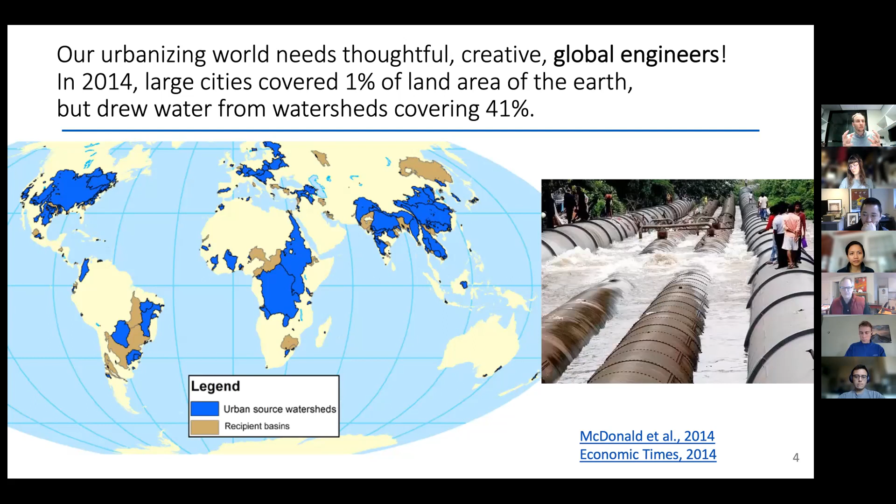And there are lots of people who do fantastic work on urban ecology and thinking about the metabolism of a city. But fundamentally, when you pile that many people in one place, they need huge energy and resource flows both in and out of the cities. And today we're going to talk about the water supply flows into those cities.

Here's your refresher on what safely managed means or needs. The water supply needs to be on the premise. So in your front yard, in your backyard, or in your house. Why? Because then you'll use more of it and social marginalization can't affect how much you get.

It has to be free of contamination. That's important. It also needs to be available when needed, because giving people empty water pipes is useless. You need water in your water pipes. And when you have those conditions, it counts as safely managed.

So why don't we have data on these countries? We have data from nationally representative data. That doesn't mean we know everything, but we know enough to make a credible estimate for premise piping in 90% of countries. We know for 60% of countries what percent of their supplies are contamination free. But we only know half of the countries in terms of whether or not they're available when needed.

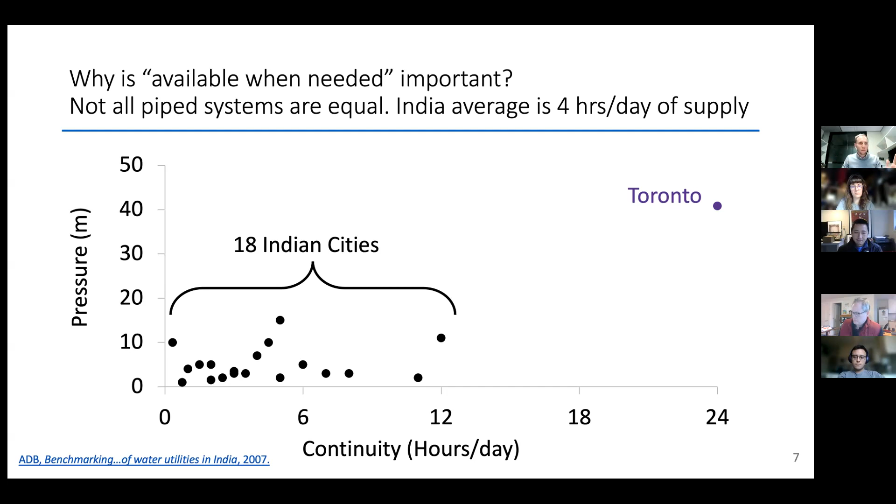So you guys are here to learn about systems, but you also think about them already, I suspect. This isn't your first foray into this domain. And you guys are clever problem solvers or clever engineers. And so you can imagine if you were one of the 1 billion people on the planet who plugged into an intermittent water supply, you would find ways to make it better.

So intermittent water supplies are not just an Indian issue, they are pervasive. Aaron Bivins in 2017 did a great estimate that suggested 1 billion people are plugged into intermittent water supplies, which means that 1 out of every 5 people on the planet that gets water from a water pipe gets water from an intermittent water pipe, which means improving them is key. So if you were one of these 1 billion consumers, you would adapt. And here are 3 adaptations I see all the time.

On the left, we call them spaghetti pipes. If you live in a neighborhood with low pressure or not that much water, and you're not that far away from another neighborhood that has better pressure, maybe they're from a different segment of society, maybe they're just at a more favorable elevation, but maybe the chief of police lives there. Well, you could buy yourself a pipe at the market, and in the night, either yourself or with a plumber, run that pipe over to your neighbor's house and plug it into their water main that's serviced with better pressure.

And then all of a sudden you've got lots of water, so your neighbors think, that's great, I'll do it too. And then when you drive down the road, you see piles and piles of spaghetti pipes leading from a low pressure neighborhood to a high pressure neighborhood to improve the supply. I picked this particular picture because you can see that these pipes are right next to an open sewer. So we have this constant tension between water access and water quality.

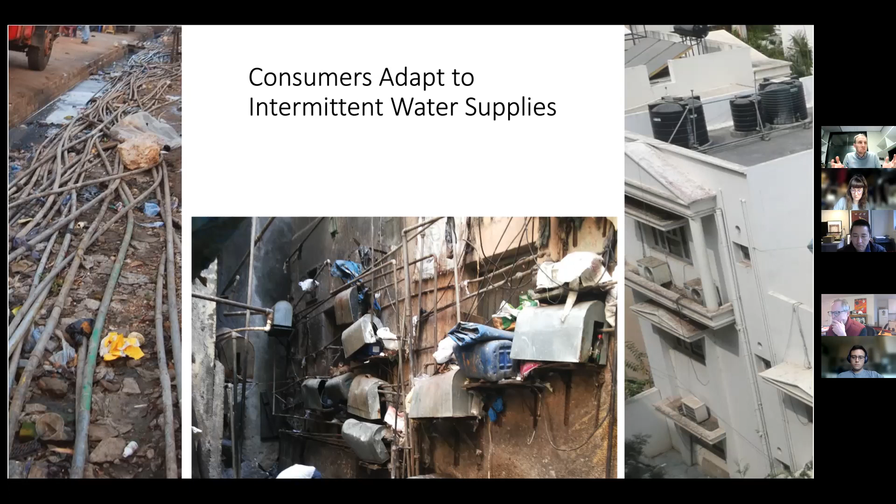So consumers are great at adapting to intermittent water supplies. Why are they a problem? Well, fundamentally, the first problem with intermittent water supplies is water quality. So positively pressurized pipes push water out of their cracks. That's what keeps our drinking water safe.

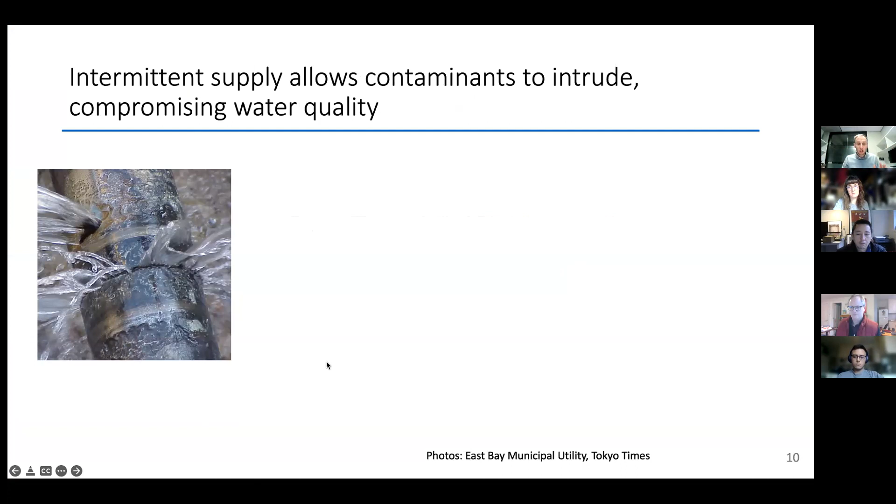If you have a low pressure supply or a negative or an empty pipe, the cracks can go the other way and contaminants can intrude into the water pipes. And then when we turn the system back on, that wall of gross water that has filtered into the pipes overnight while they were turned off gets flushed through the system to those eagerly expecting consumers.

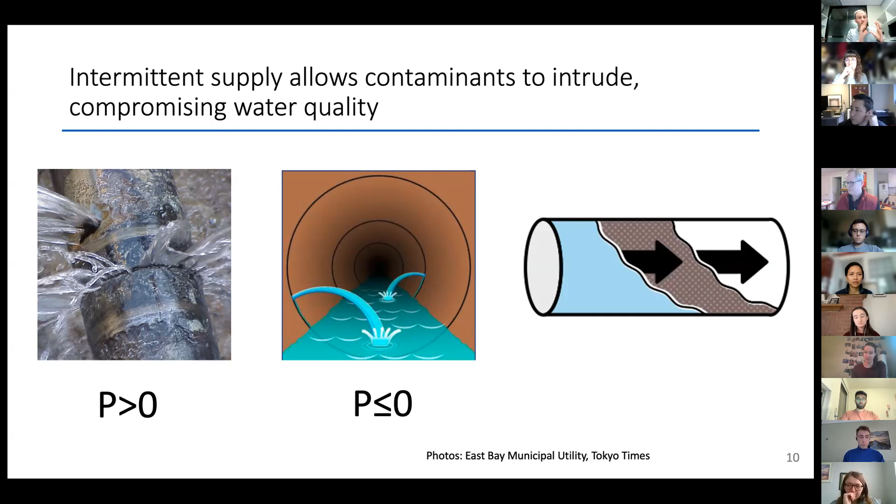You can imagine that if you have a tank on your roof, this big black plastic tank, and you fill it with the intruded contaminants that came overnight, it spends all day baking in the sun, and you get your own little bioreactor. So intermittent water supplies can allow contaminants to intrude, which compromises our water quality.

So improving intermittent supplies is really important, but it is not easy. So I don't know what else is going on in your day, but I hope that none of you have on your to-do list to make the calibrated hydraulic model for the network pictured here, right? This would be impossible. Yet in our traditional kind of top-down engineering mindset, what we like to do is know everything about the system, calibrate our mathematical models, and then be able to predict the future, right?

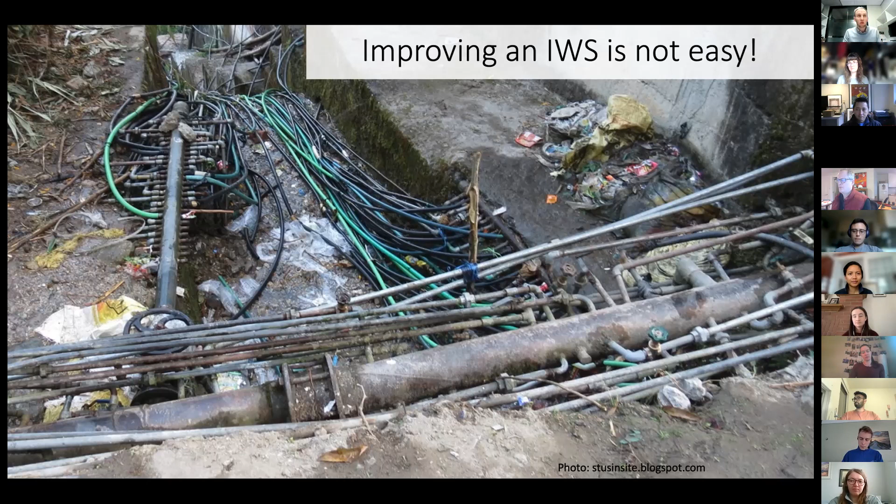We talk about this digital twin between the real world and the hydraulic world as kind of the new frontier in municipal engineering. There will be no digital twin for this picture. Priya Sangameswaran writes beautifully about neoliberalism and Maharashtra's water supply reforms. And she critiques that the current method of improving water supply networks requires near perfect knowledge, which is totally at odds with the chaotic arrangements that actually characterize Indian cities.

This is not a critique of Indian cities, but it would generalize to most intermittent water supplies, to most megacities around the world. They are growing rapidly, and the chaos associated with that growth is kind of an affront to our traditional, we must understand it before we can improve it, engineering paradigms.

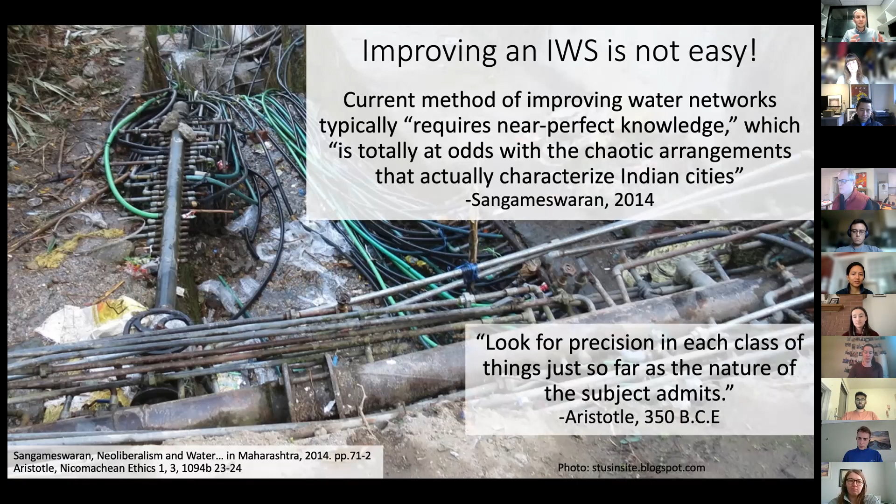So what can we do? Aristotle might recommend that we look for the precision in each class of things just so far as the nature of the subject admits. And I would submit to you that the nature of the subject in this photo suggests that we better do something pretty simple because of its chaos. So what I want to tell you about today is the simplest ever model for an intermittent water supply. It has only one consumer.

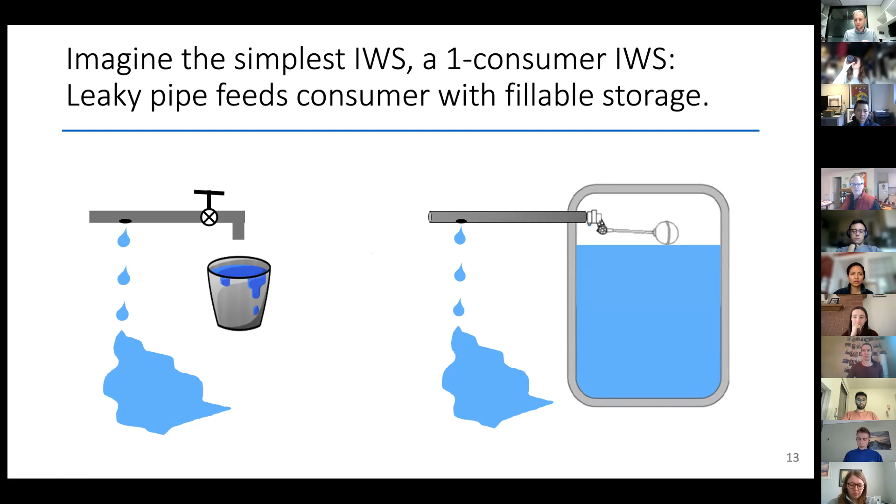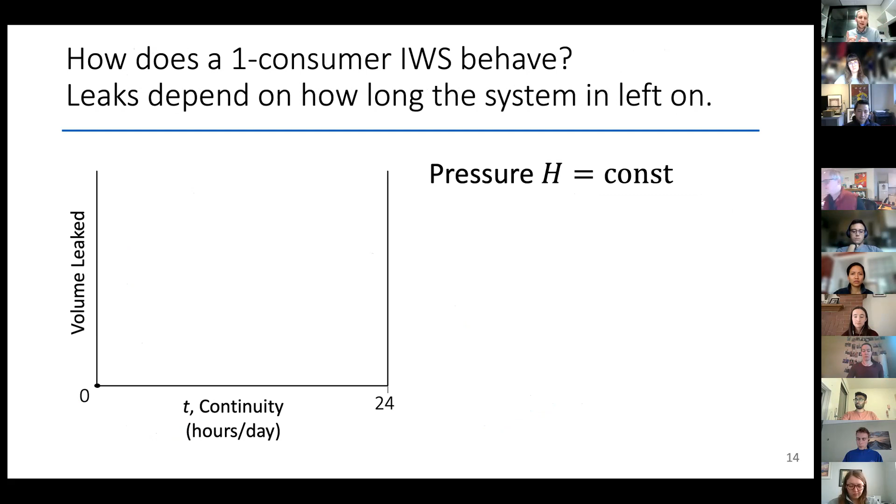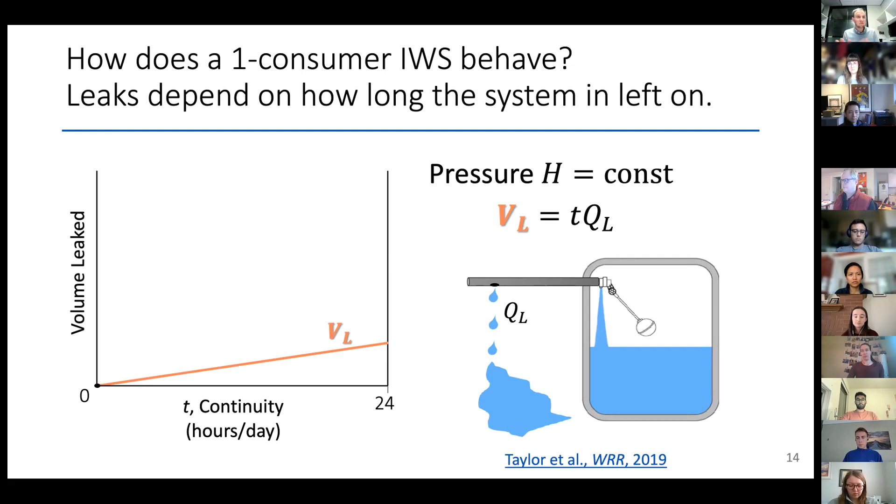So with this model, we'll go forward and say, what can we do with this? How does a one consumer intermittent water system behave? Well, the leaks in a simple system with constant pressure come out at constant pressure at a constant flow rate. So then the longer we let it leak, the more water we lose to leakage, right? If you go from 2 to 4 hours a day of supply, leakage doubles in the short term, all else being equal. From 4 to 8, doubles again. 8 to 16, doubles again.

What about the amount of water received by consumers? If you only give everyone in your network 10 minutes of supply, no one has enough. So if you leave it on for 20 minutes instead of 10, everyone would like double what they just got. And if you go from 20 minutes to 40 minutes, that's probably true again. But somewhere, when you go from 20 hours of supply to 21 hours of supply, most people's swimming pools are already full. And so somewhere on this curve, consumers become satisfied and their tanks are full.

And so this was my big idea behind this model, is that there are two regimes, one where consumers are filling their tanks and one where they're pretty happy. And so if we put on our top-down water utility hard hats and say, how much water do we need to put into this network? Well, it simply becomes the superposition of these two piecewise linear curves. For every liter we lose to leakage or liter that goes to a consumer, that's a liter of water that needs to go into the network.

And here's where the model gets interesting. We can now study these two very different regimes. And we can use this model to probe the causes of intermittent supply and perhaps opportunities to improve them. So if you're operating a water utility and all you have is that dashed blue line of water availability, you have an intermittent water supply. Your intermittent water supply cuts off at time t. Maybe that's, I don't know, 10 hours a day of supply.

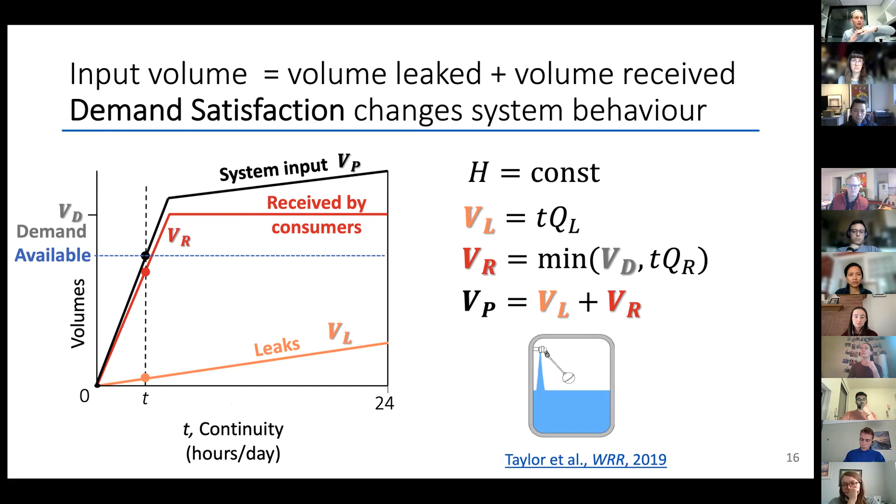If it gets to be the dry season and you have less water, you still have the same pipes. They still leak at similar rates. You still have the same consumers. But all of a sudden you have way less hours per day of supply because of a source water change. So these two regimes, the steep slope area and the shallow slope area, are the key features I want to spend a good chunk of time today talking about.

But before we talk too much more about this model, you ought to ask yourself, why would I care about a one consumer model? No one has a one consumer intermittent water supply. Is it accurate? Should I trust it? So to test this in my research, I compared it to a numerical simulation of a physical network inspired by the Modena network in Italy. It's one of these free EPANET models you can download. It's a continuous water supply. So to make it an intermittent water supply, I gave every consumer tanks and some leaks in the network.

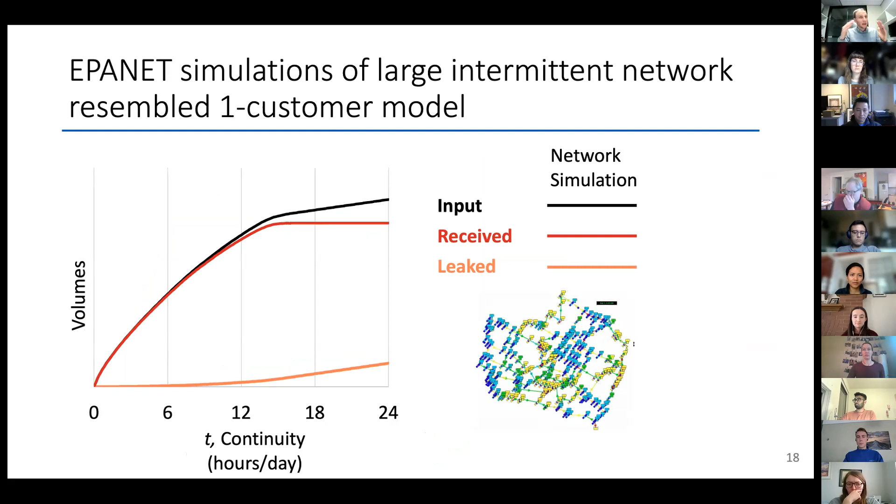And you simulate it spatially and temporally, so it's changing over time and space. And you can watch consumers go from yellow, not having enough water, all the way to blue when they're happy. And now we can ask, how did that network perform? So this is the numerical results from that simulation. Is it piecewise linear? No. Is it a whole lot like the straight line model I constructed with you guys? Yes. And in fact, it was surprisingly accurate. I got an R² after calibration of 0.98. So almost all of the variation in this model is explained by the piecewise linear behavior of a one consumer intermittent supply. So that gives me reason to think we should probe this simple model to learn about intermittent supplies.

And so if we do that together, I'll call this green region, where the black line is pretty shallow and consumers have the water they want, a satisfied intermittent supply. And I would suggest that improving intermittent supplies like this is hard, but feasible. So in this example, the intermittent supply operates for 12 hours a day, but consumers would be satisfied if they got anything more than 6.

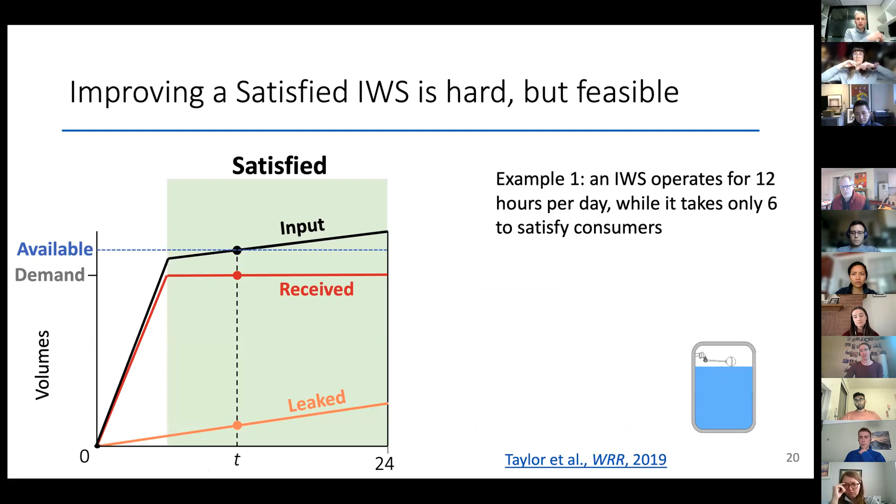So you're running this utility and you want to fix the network, or you're at a donor agency trying to figure out how much money to allocate to help this city improve their water supply. Well, in this type of water supply, if you found and fixed leaks in your network, so you went from the solid orange line to the dashed orange line, you could change the black curve and run your city 24 hours a day with the same amount of water, because as you slow down the flow rate of your leaks, you can leave them leaking longer.

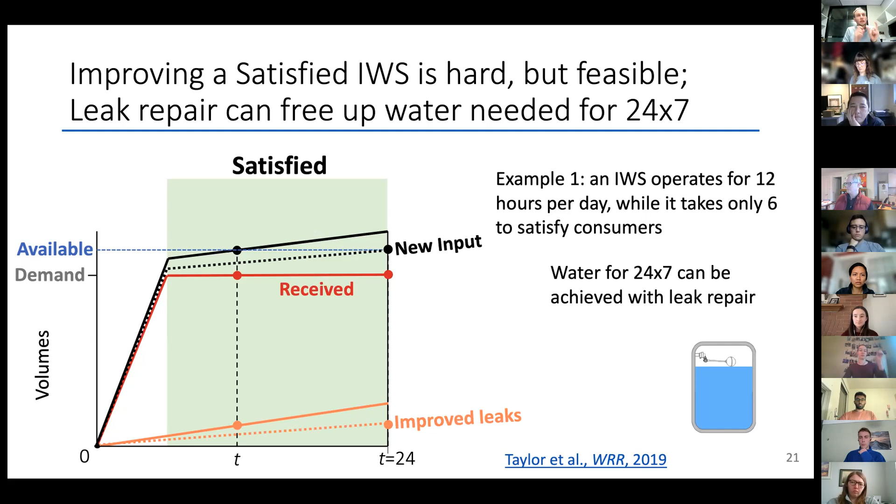So we can achieve 24/7 in these systems by leak repair alone. But there is a harder part of this story. If you are working with an unsatisfied intermittent water supply, they're really hard to improve. So in this example, the intermittent supply operates for 2 hours a day when it would take 6 to satisfy consumers. So I'm going to stretch this graph out to be from 0 to 6, not 0 to 24 on that horizontal axis, just so you can see what happens.

And what happens here is that blue line is our water availability. And so if you pay a public agent, if you pay a water utility or you privatize your network, your private operator is going to spend a lot of money finding and fixing the leaks. And if they find and fix every single leak, you can increase your supply hour. But you probably did not fund this project expecting to go from 2 hours a day to 2.4 hours a day of water supply. You would have spent millions of dollars finding and fixing leaks, arguably for naught.

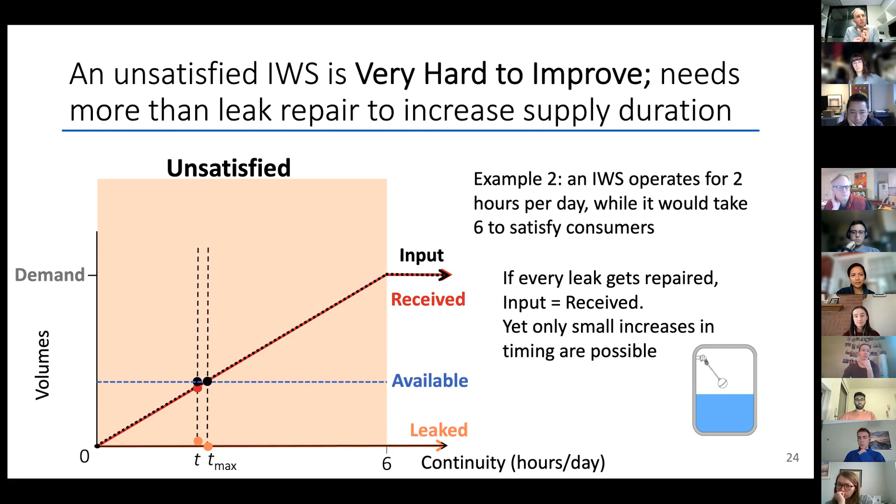So only a small increase is possible with leak repair alone in this type of intermittent supply. Even if it's a really leaky intermittent supply, like 40, 50% leakage, when you fix all of those leaks, you still can't satisfy your network. And so this type of intermittent supply is much harder to improve. And I think it needs different planning tools. I think we need to be more realistic about the projects we set up in these systems, because we certainly shouldn't be spending a lot of money to find and fix the leaks, believing that will be the mechanism by which we achieve continuous supply.

So I've used this model to argue there are two types of intermittent supplies. Very hard to improve intermittent supplies, where at the end of the supply, customer tanks are still empty. If you gave them more water, they'd take more water. And the everyday, just hard to improve intermittent water supplies, where at the end of the supply, consumers are satisfied, which means the leak repairs are an efficient lever to pull. If you want to read all about the calculus and the model behind this, there's some links in the slide deck. But I want to focus on the implications, because this isn't a theory talk.

The first thing I think we need to be really clear about is that demand is what consumers want, not what they should want, not what public health guidelines suggest we should give them as a minimum. So for example, if your standards manual suggests that you should provide 150 liters per person per day to everyone in a city, if you happen to be supplying to a neighborhood where people, for whatever reason, haven't read that standards manual and would like 200 instead, then you're in this setup with the blue curve and the red curve, and you will have an intermittent supply. An unsatisfied intermittent supply, simply because you have failed to account for how much consumers actually want.

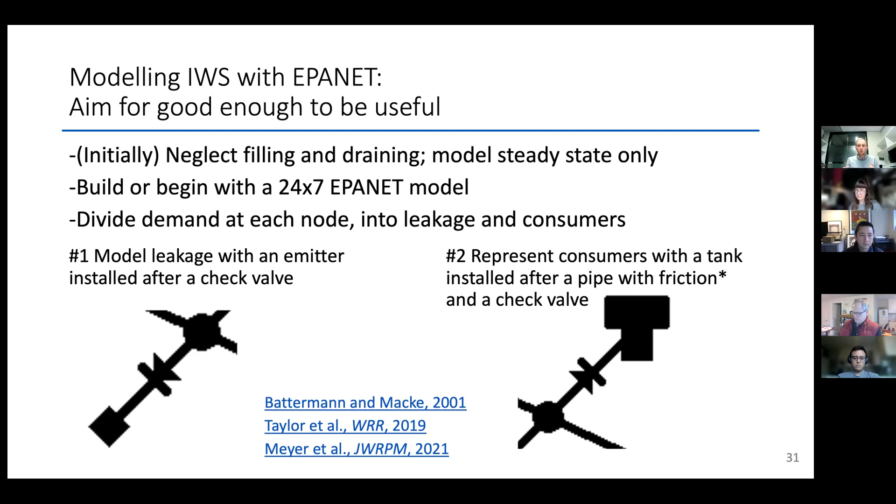I've put some papers here, some by me, some by others, that kind of debate about how to best represent the connection between that consumer tank and the network. But fundamentally, I think this is the easiest, most useful way of representing, at least initially, how an intermittent network would behave.

And when you do that, you get videos like the one I've showed you before, where you can watch how water is flowing through your pipe network, and you can model how different tanks at different times are filling, right? So you can say like, oh, actually, after 7 hours of supply, this many consumers have enough water, and so on and so forth.

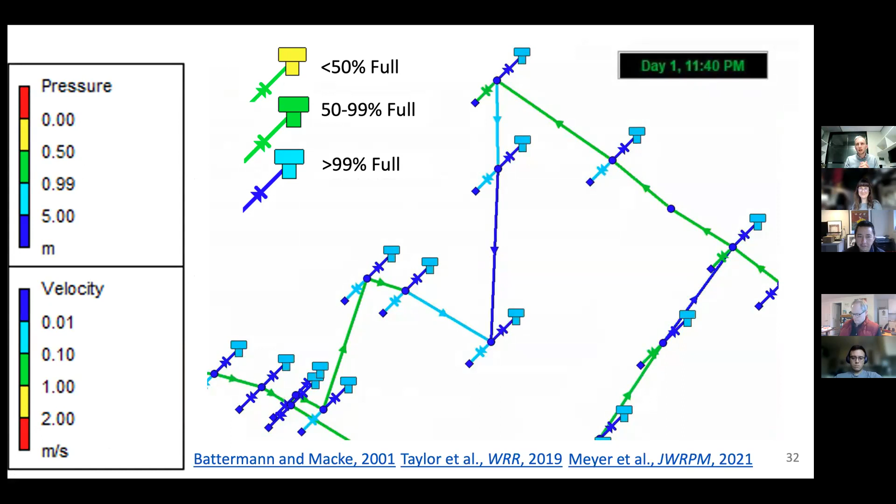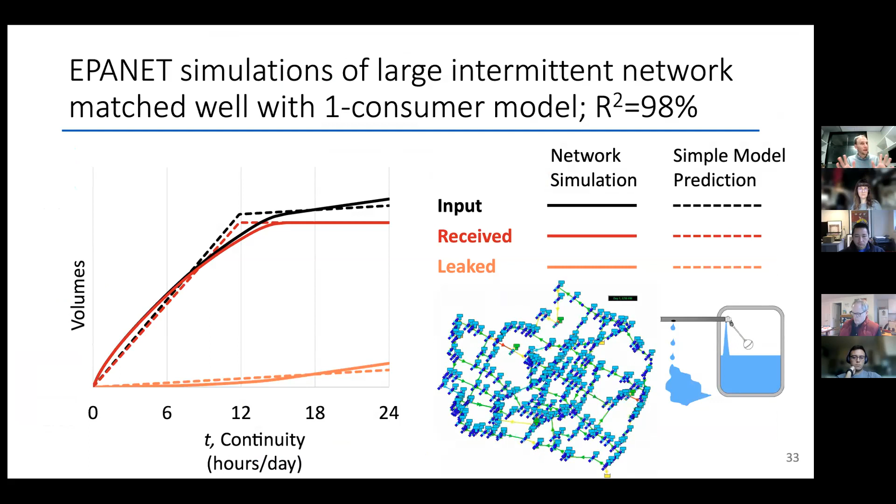So that's how I think about intermittent supplies, and that's the same method I use to validate this model. And if you've got your thoughtful critical hat on, a lot of the assumptions behind my model and in the modeling method are similar, which is perhaps why they align so well. But we can talk about that in the Q&A if you want.

My other two practical tips before I just show you a conclusion slide is one, measure leakage, at least on a per hour basis. There's a lot of unknown in intermittent water supplies. And so the utilities you may be working with or interviewing or studying likely have some averages or some assumptions in their model. And so Delhi, India's capital, might suggest they have 40% non-revenue water or leakage, which means that's 10% per hour of supply.

So if they're losing 10% of their total water volume per hour the system is on, how much water would they lose after 10 hours of supply? Well, it's kind of a math conundrum because you can't leak 100% of your water, and the math gets a little more complicated if you want to keep the percentage of total water. But fundamentally, to stay on 10 hours a day, Delhi would need to leak 100% of its current water. So why is it an intermittent system? There are many reasons, but measuring leakage on a per hour basis will help you figure out whether leaks are one of them.

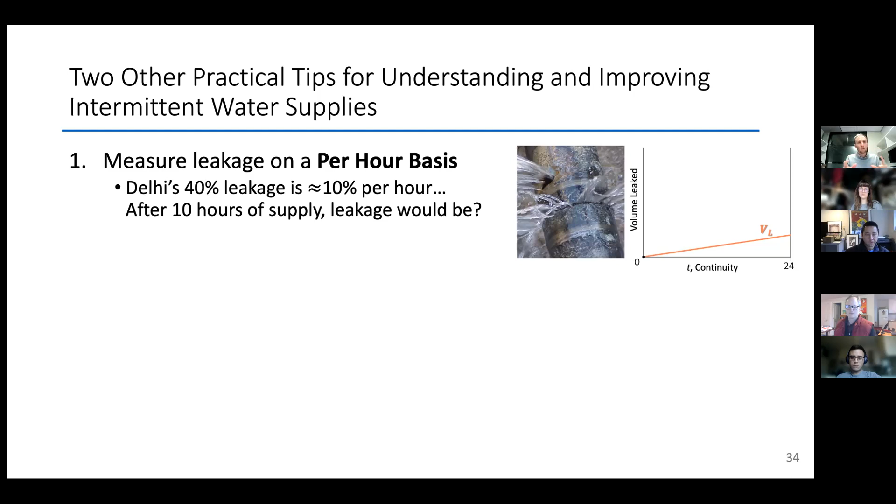The second thing is I've spent a lot of time in my research thinking about consumer suction pumps, these pumps people are using to pull water out. I've got a new paper that uses a pressure sustaining valve to try and fight them. But one of the stories I wanted to tell you is that where these suction pumps are most problematic, their removal is most contested. And where their removal is most feasible, their effects are most small. And so it's not often a low-hanging, high-leverage intervention point to tackle the suction pumps first. It's kind of a hard-learned lesson I've had recently.

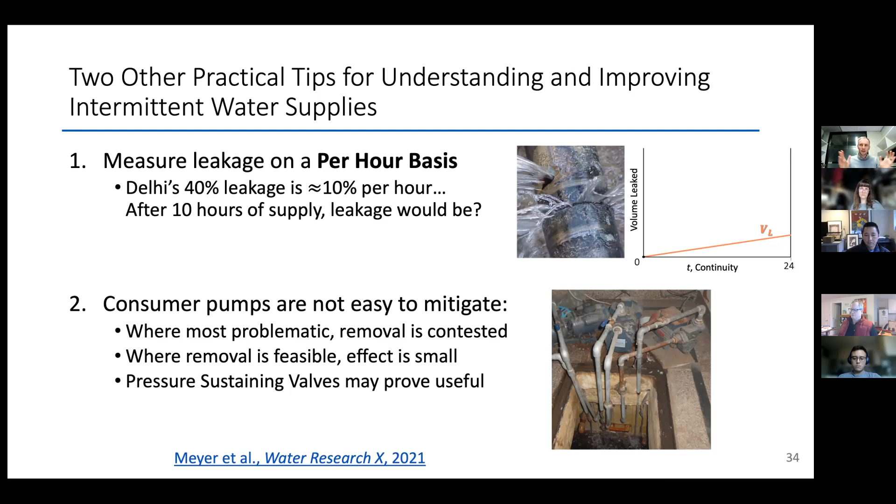So fundamentally, I'll tell you what I told you today. We talked about improving and understanding intermittent water supplies with these two kind of models of an intermittent water supply, of what consumer tanks would look like when the system turned off. They're either empty or full. And talked about how these unsatisfied versus satisfied regimes can help us think a lot about how feasibly we could improve an intermittent supply.

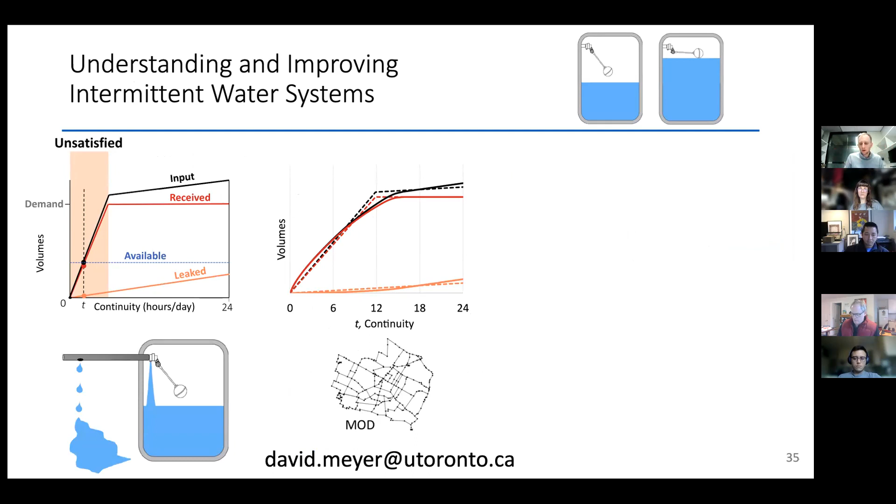I showed you some hand-wavy validation data from the Modena network. Showed you some tricks you could use to model an intermittent supply in EPANET, and then concluded with some other tricks on thinking about the importance of leakage on a per hour basis and why I wouldn't recommend you start by focusing on consumer suction pumps.